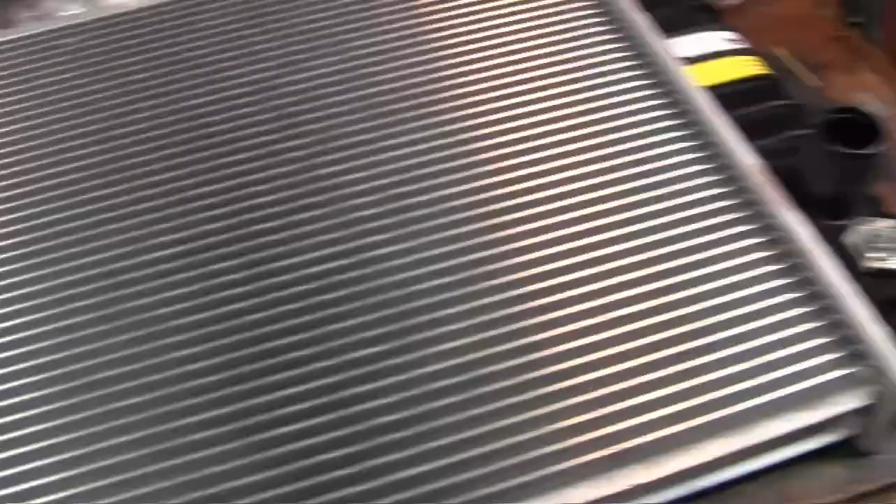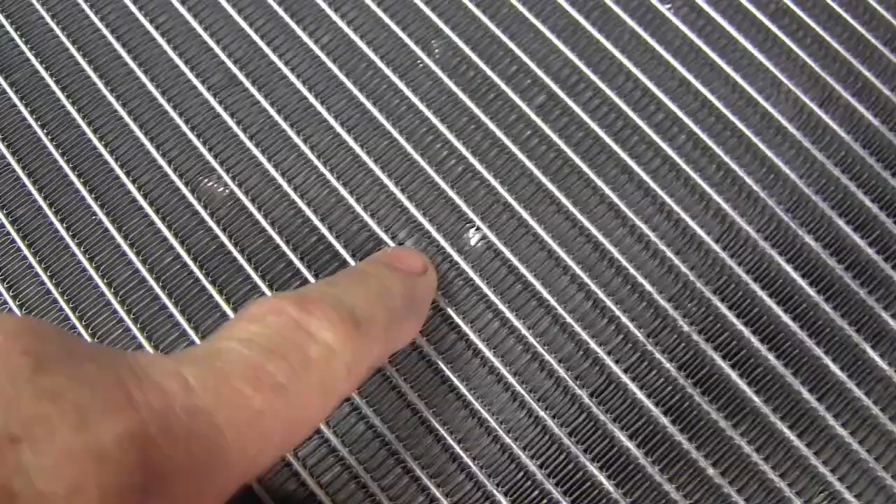In this production today, we're going to box this real nice Napa radiator and take it back to them and ask for my money back because of the damage. Whoever put it in the box, or before they put it in the box, it's been damaged and it looks like it would most likely leak.

Maybe. And I ordered another one, and we'll see. It's supposed to be in on Wednesday, but bad luck that it's damaged. Bad luck. So we're going to carry on.

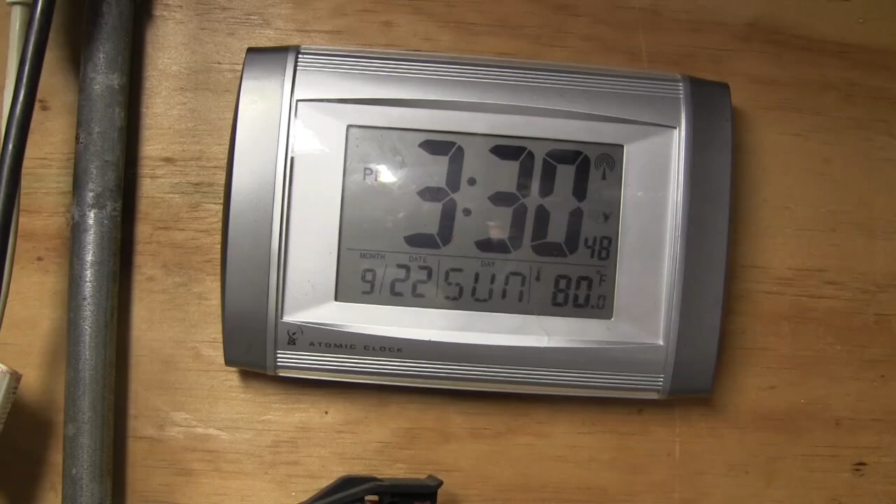It's a Sunday afternoon. This video is about my 2003 Sears Craftsman GT5000 lawn tractor. We'll go outside and we'll talk a little more.

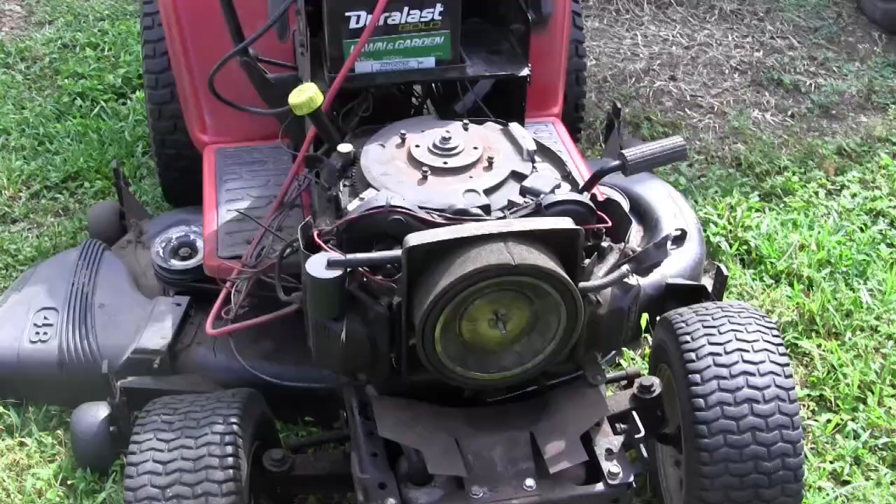2023, May, caught fire due to an oil leak. Rebuilt the governor, repaired the carburetor, did a bunch of other stuff. Didn't replace everything though. In the course of doing some repairs, I removed the flywheel, and now I keep breaking woodruff keys. The woodruff key is 3/16 by 3/4, so it's a standard item.

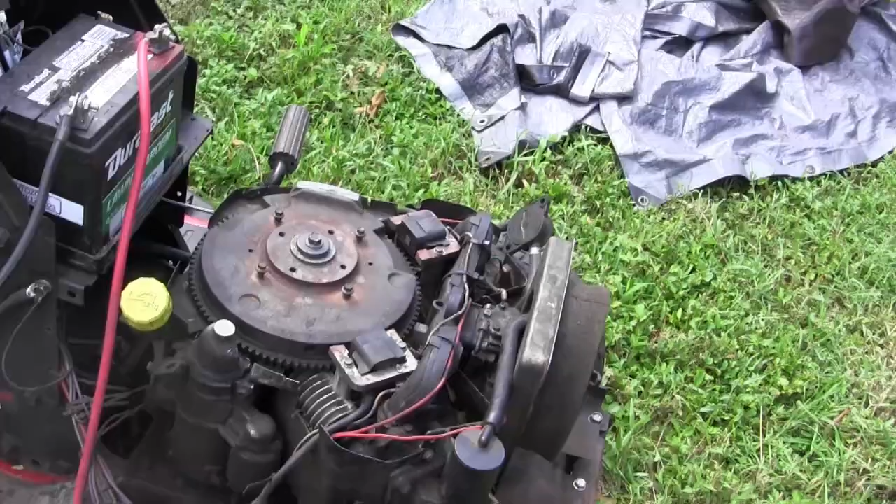However, the price, if you buy it with the Kohler, the 25 horse version of this engine, Kohler Command, it's $4 or $5 each. So buy them online or at your hardware store.

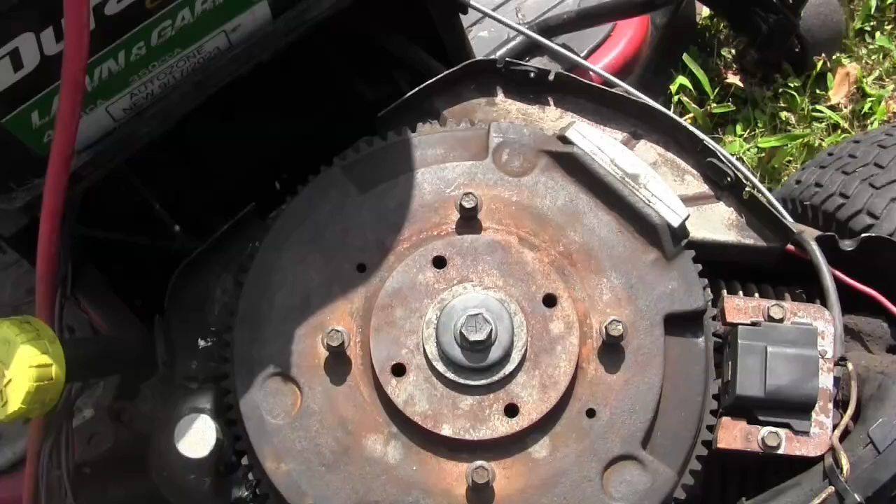But I don't know why I put a piece of brass in here, and that worked for a while, like an insert, like a shim, and I got this torqued to spec, but it keeps failing, the woodruff key. So anyway, I ordered some online, going to be delivered tomorrow, but I'm going to show you how you can tell if your keyway is blown.

I'm going to show you this. Watch, you'll see the flywheel will move, but the center won't. See that? So you know the woodruff key has failed.

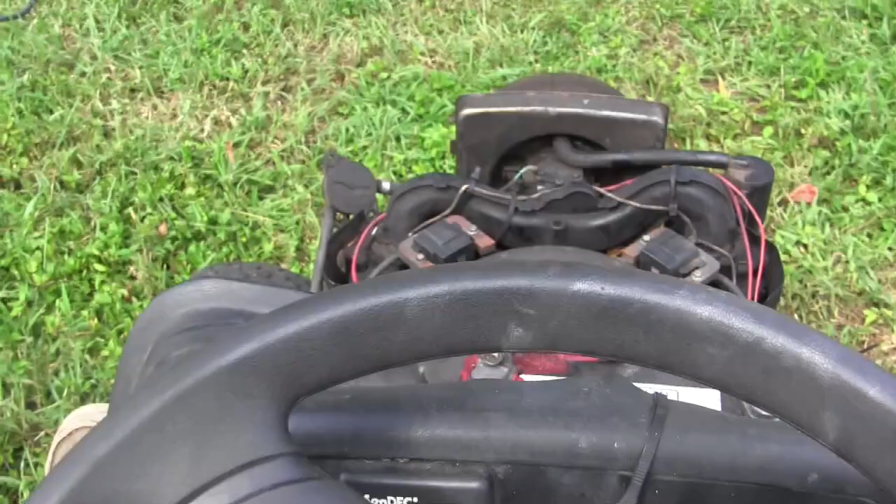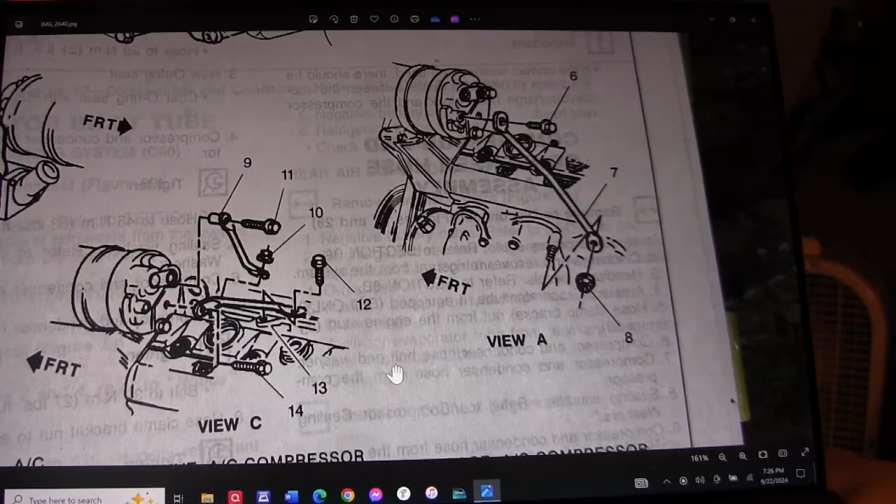My 1994 Astro van. Well, I'm waiting for the Napa radiator to come in on Wednesday, I hope. I'm trying to get these brackets sorted on the back of the A/C compressor, and there's some inconsistencies in the service manual.

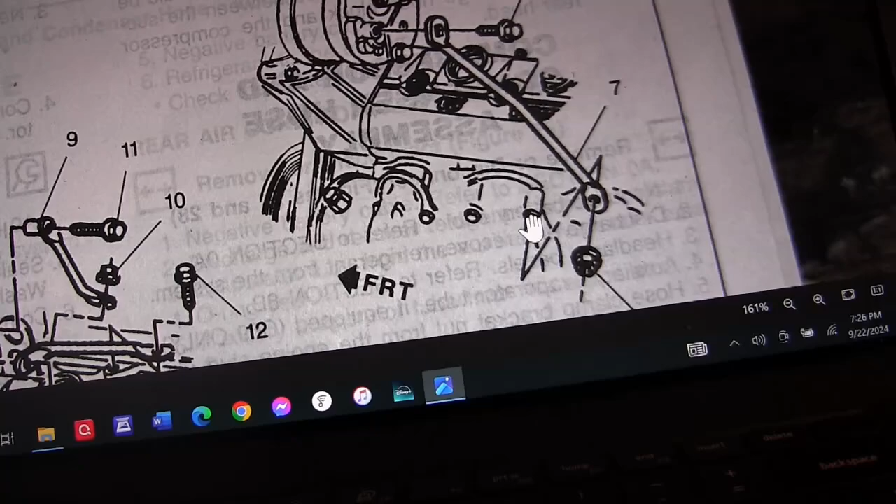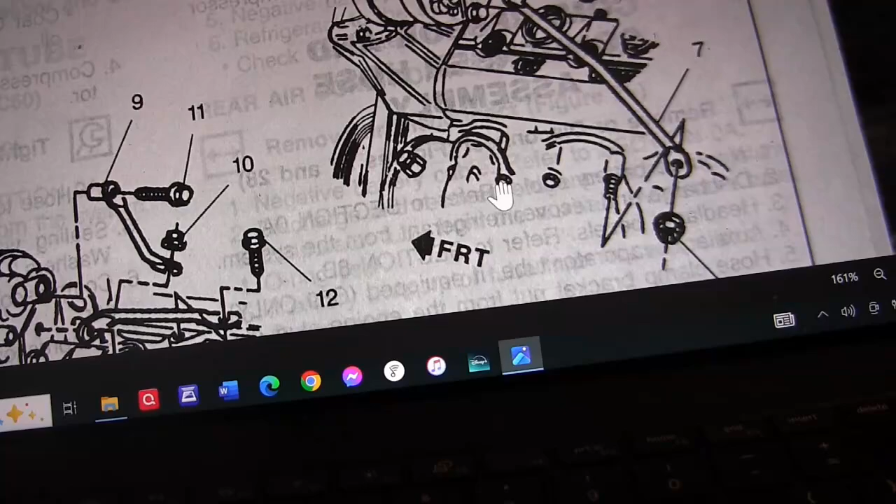Now there's some inconsistencies in the book because there's a stud on the front side of number 1, and I thought there was a stud on both sides, but I'm wrong. There's just a stud on the front side. On the back side of number 1 is a bolt. The back side of number 3, cylinder number 3, is the stud to hold that rod. Now besides that, I'm trying to ferret out this rod over here.

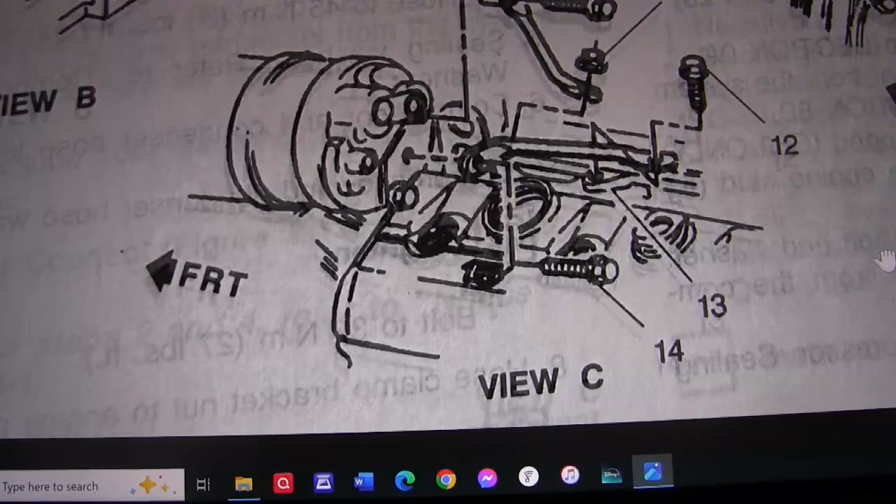Let me blow this up a little bit. This is one of the reasons why I like to scan in service manuals, is so I can look at it carefully on the computer.

But this lower rod I was able to get sorted. This bolt here, number 14, is an M8 by 1.25, which is a coarse thread metric M8 bolt, and I like the flange head bolts.

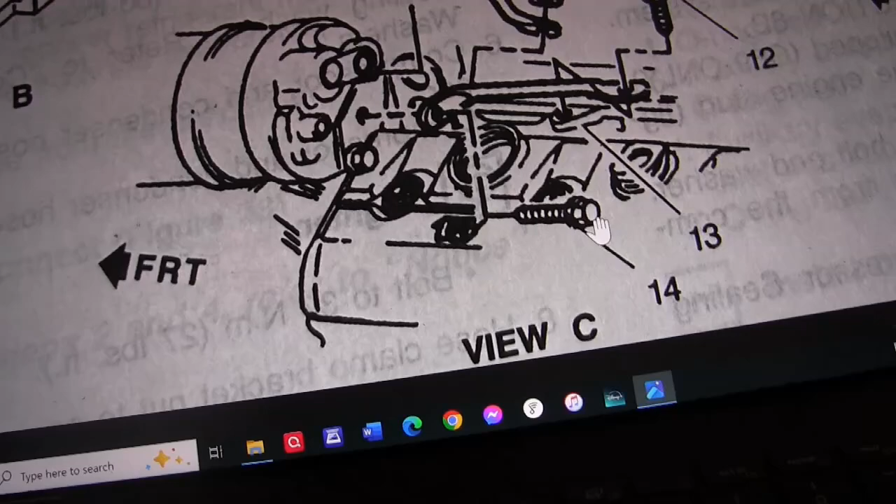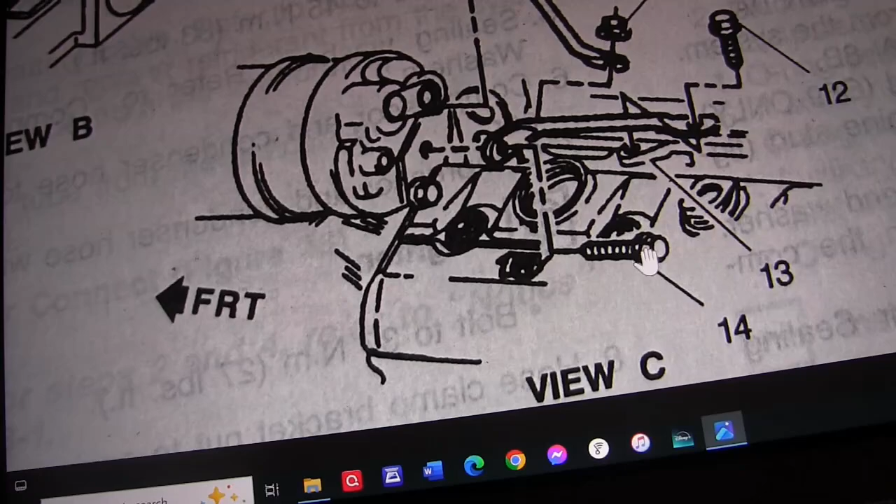Now the other, it connects here to the upper, or the intake manifold, and so I haven't taken out bolt number 12 yet and bolted this down hard yet. Tomorrow I'll do it, and it takes an M8 lock nut, lock washer.

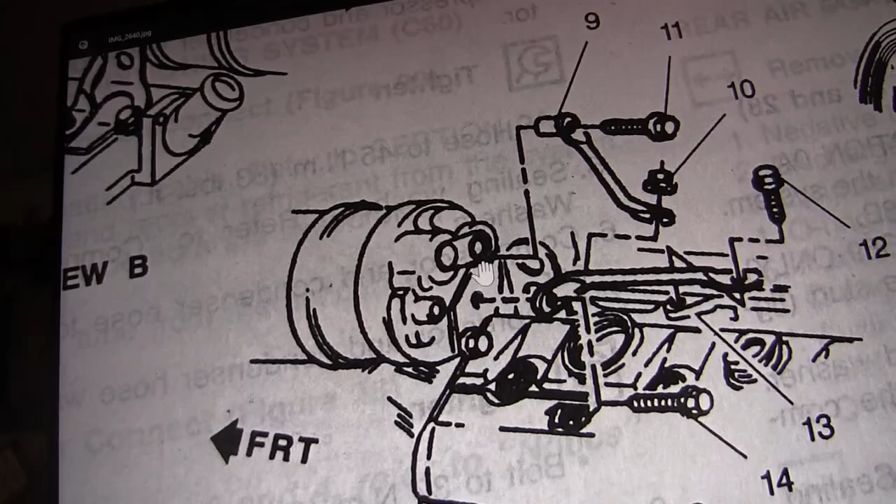But this one here is a booger, because this rod here goes from, this is like a metal plate on the back of the air conditioning compressor, and this top one, it's a real big bolt hole, but where it screws into the compressor is small, so it looks like it was, I thought it was an M8, but M8 didn't work.

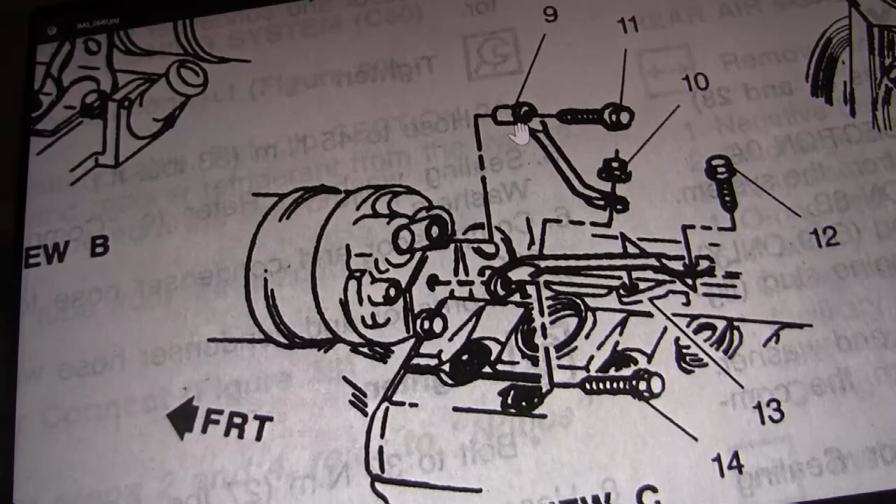So I tried M6 and that didn't work. So this number 11 must be a special bolt. It must have some kind of reduction in it, because this is a large diameter, but where it goes in the compressor is a small diameter. I'll try to get some pictures tomorrow.

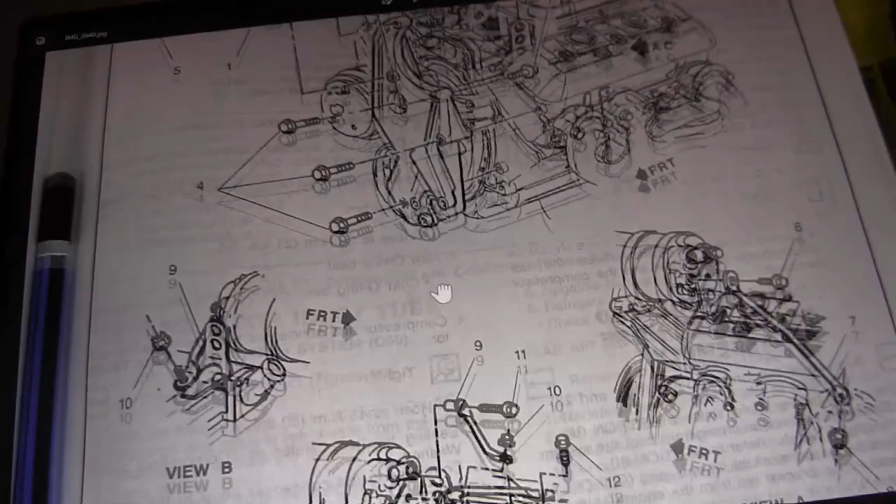Sometimes I take photographs of stuff and then look at it on the computer, and it's easier to understand. But nobody caught me on this. I kept saying that the studs were on either side of number 1 exhaust, and I was wrong. The stud is on the front side of number 1 and on the back side of number 3 exhaust.

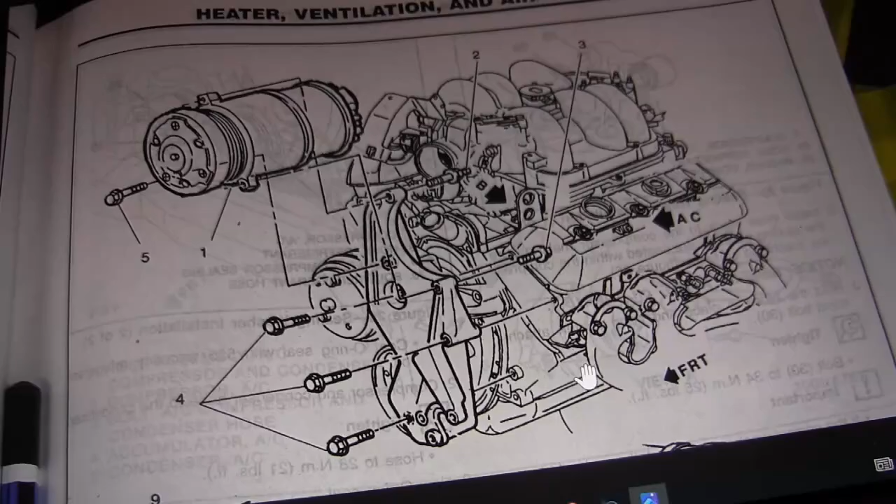And as you know, I don't have the right studs yet, but I shared a lot of these pages recently with the Astro group, and I put it in the files and media section. I like using the media section because I'm able to create albums by subject or keyword or problem, and then put all the information, multiple pages, into that album.

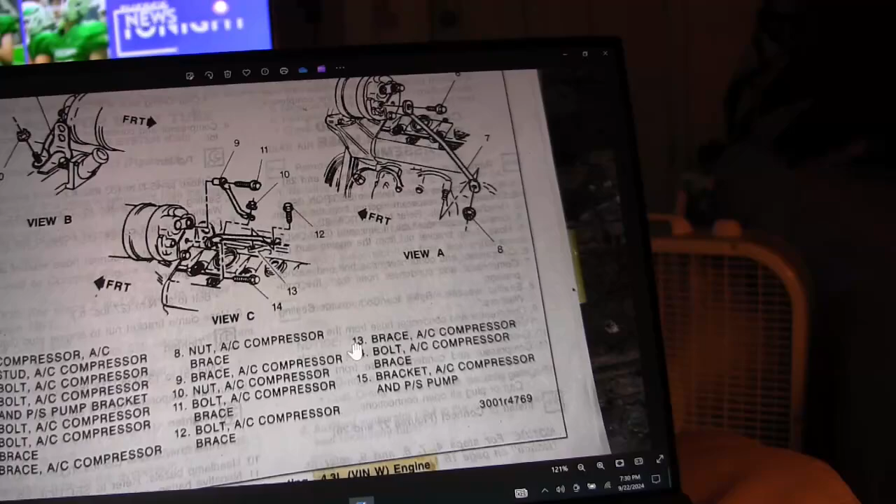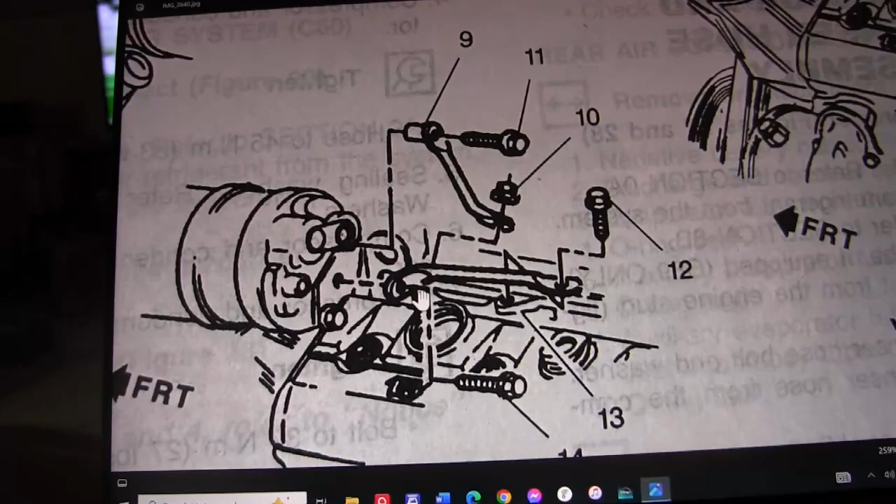And let's say we were talking about this, I'd put all this information in an album and say, you know, air conditioning mounting. Now, I don't really understand what the need is for this thing here. Or excuse me, that one is reasonable. I don't understand why, to me this is overkill, but who am I to second guess a mechanical engineer that lived in the 1980s?

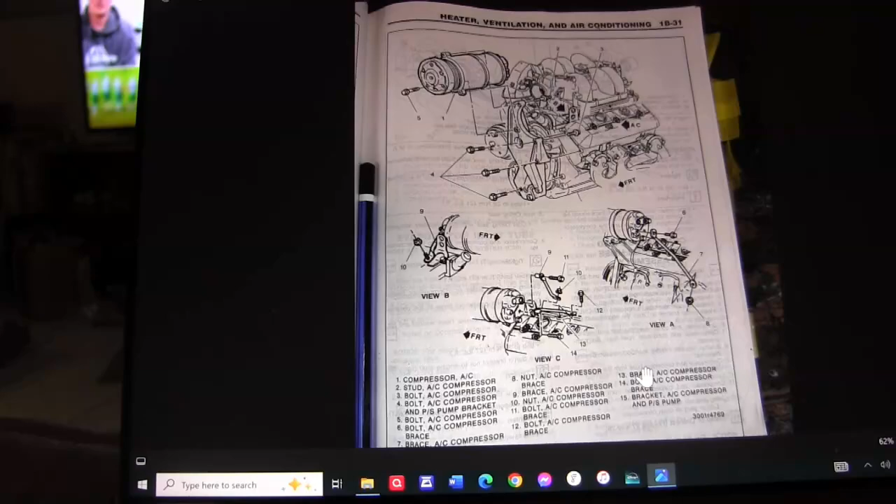You know, this van's 30 years old. Anyway, I hope you find this video documentary useful, or at least entertaining.

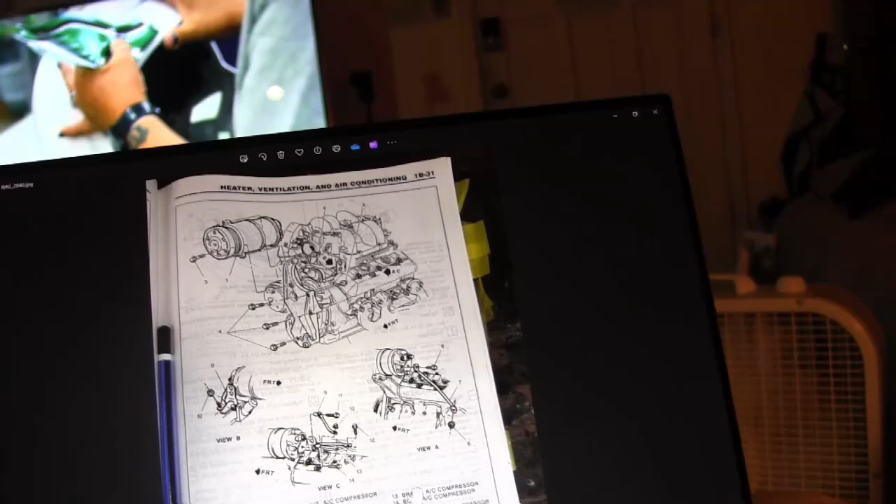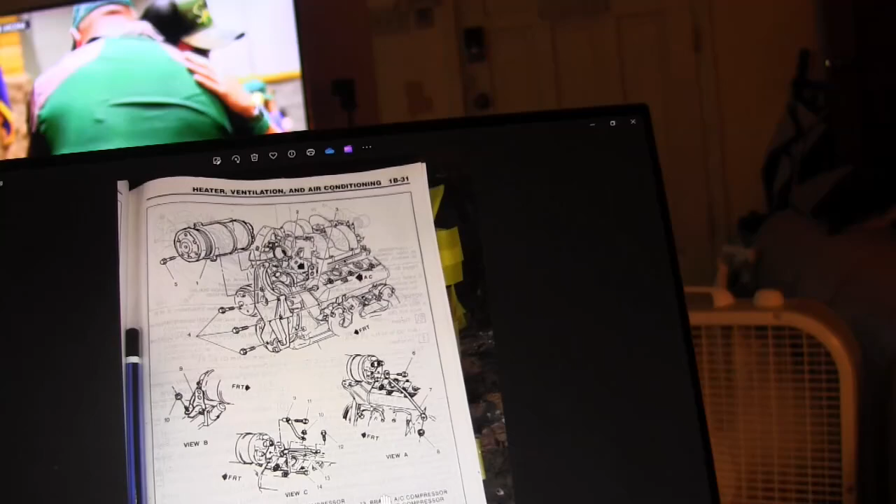A lot of these Chevys are similar that use this 4.3 liter V6 engine. This is a mighty mouse of an engine and puts out about 200 horsepower when it's right, give or take. Maybe a little under 200, maybe a little more, depending on whether it's TBI or fuel injection and what year. Some people say it's a mini motor of a V8 Chevy engine.

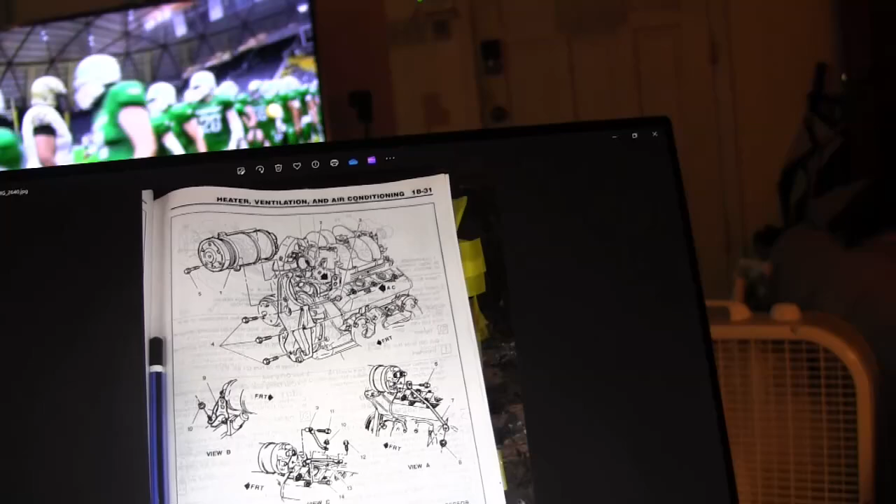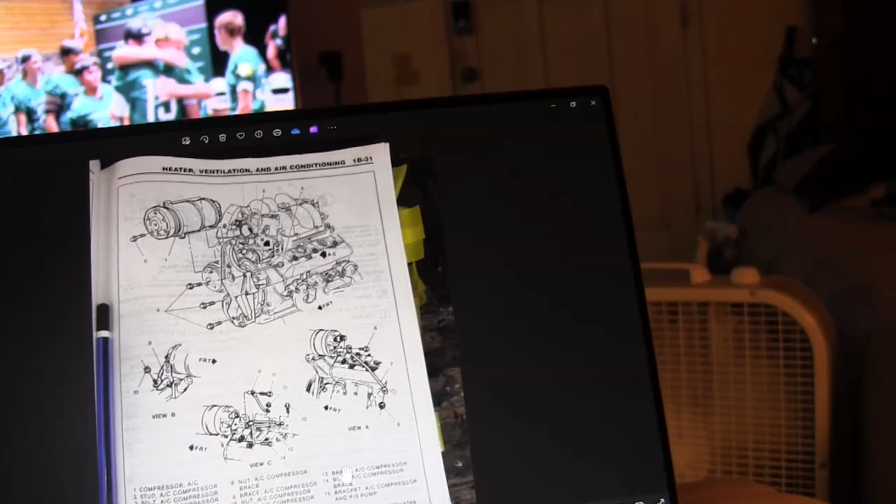Anyway, enough talking, this is the last segment for today, the 22nd of September 2024. I did get a little work today on the GT5000 lawn tractor. Got it running, but then it sheared the woodruff key again. So, oh well. Thanks for watching.